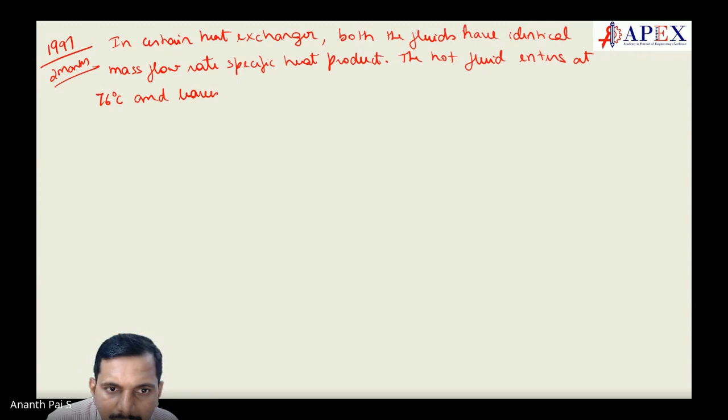the hot fluid enters at 76 degrees centigrade and leaves at 47 degrees centigrade. And the cold fluid enters at 26 degrees centigrade and leaves at 55 degrees centigrade.

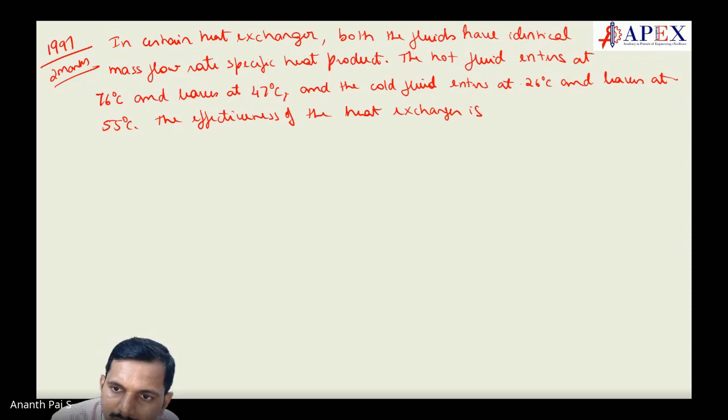The effectiveness of the heat exchanger is: A, 0.16; B, 0.58; C, 0.72; D, 1. Tell me the solution.

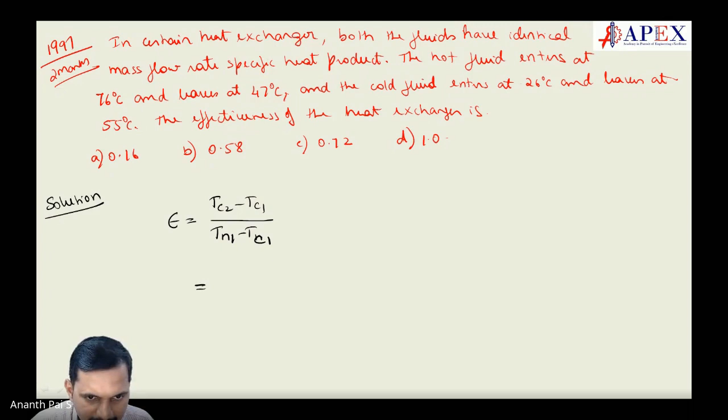minus TH2 and TH1 minus TC1.

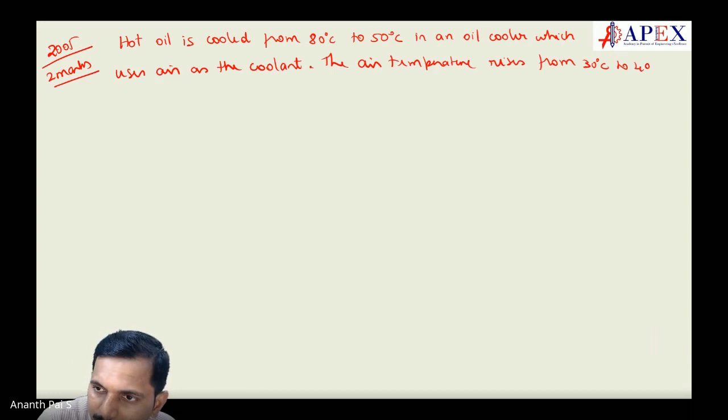The air temperature rises from 30 degrees centigrade to 40 degrees centigrade. The designer uses a LMTD value of 26 degrees centigrade. The type of heat exchanger is A.

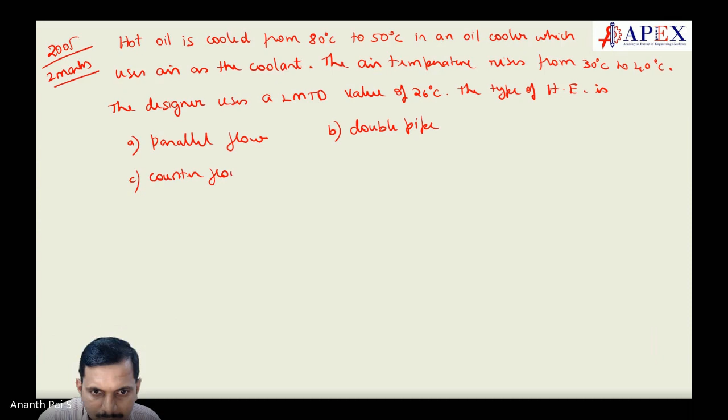Parallel flow, B. Double pipe, C. Counter flow, D. Cross flow. Which type of heat exchanger is that?

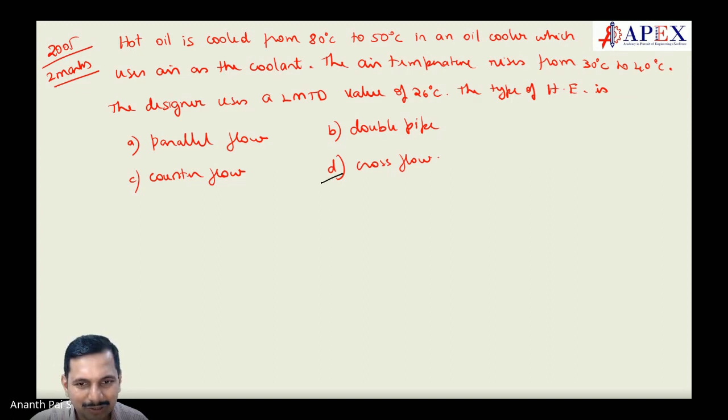Yes, we take the mean temperature. Now, how do you calculate the mean temperature here? That is not possible because until you give the mass flow rate, calculating mean temperature is difficult, right? So you cannot do 80 plus 50 divided by 2. Understand? So the answer is cross flow, because if you see cross flow, the way is like that only.

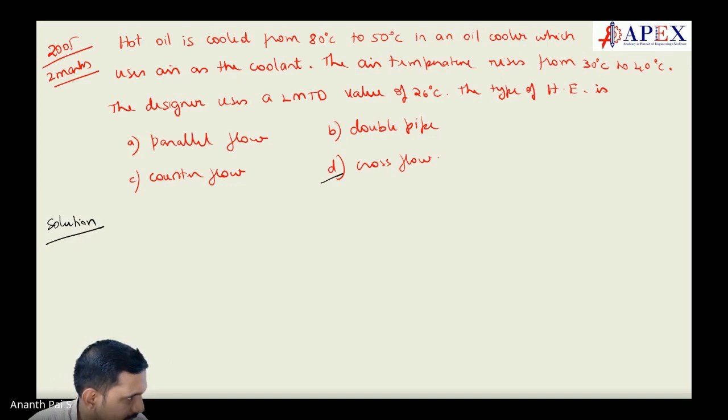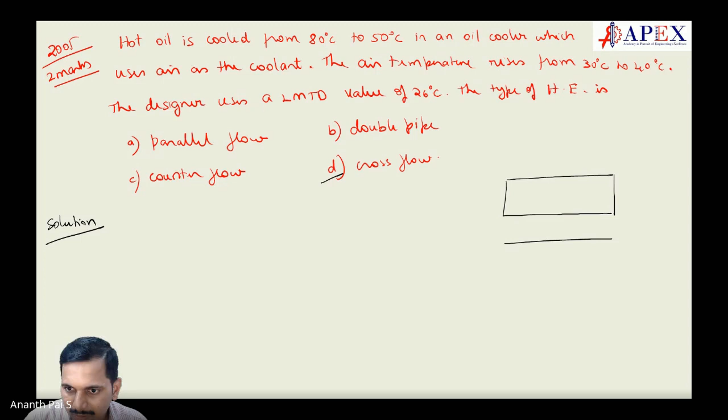Double pipe we reject. Okay, we don't take double pipe. Okay, so double pipe, what is it? I'll tell you what double pipe is. See, it's like this. Okay, so we have two pipes here. So one fluid goes in here, then this goes out, then it goes in, then it goes out. This is called double pipe heat exchanger. Okay, it is not asked much.

I'll tell you what is double pipe. Generally, cross flow, parallel flow, only two things are. Okay, those are also called multi-pass heat exchanger. So how many passes are there? It depends on that. Wait a minute. That is not double pipe. Double pipe is like this. Not two pass. It is only one. Okay, so you have in here, out here.

Okay, so this is in and out, and then what do you call it? Do you call it counterflow or this? You cannot call anything. Such kind of things are called double pipe heat exchanger.

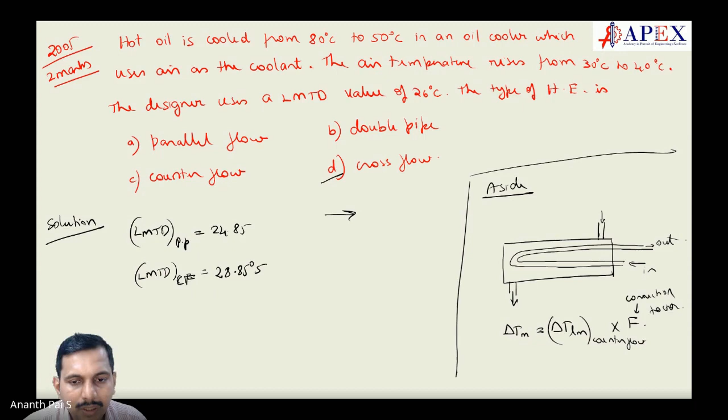First of all, we have to understand how the things go. So if you consider, in parallel flow it is like this, right? This is TH1, this is TH2, this is TC1, this is TC2. So this one is 80, 50, this is 30 and 40. Second case, if you say counter flow, this is 80, this is 50. Then here it is 30 and here it is 40. So this is delta T1, this is delta T2. Here this is delta T1 and this is delta T2.

So practice is important. So LMTD is equal to delta T1 minus delta T2 divided by log of delta T1 divided by delta T2. Like this way.

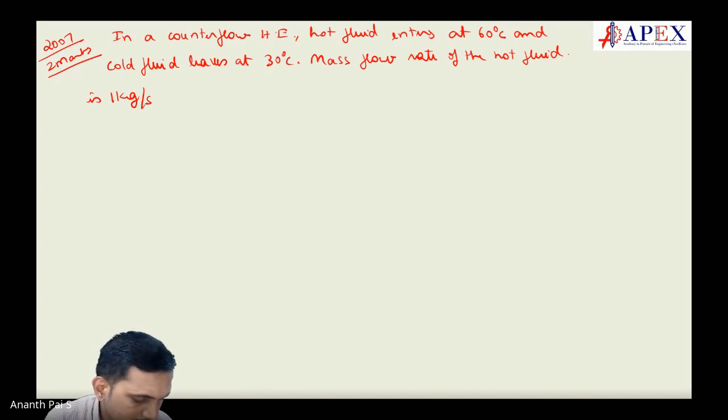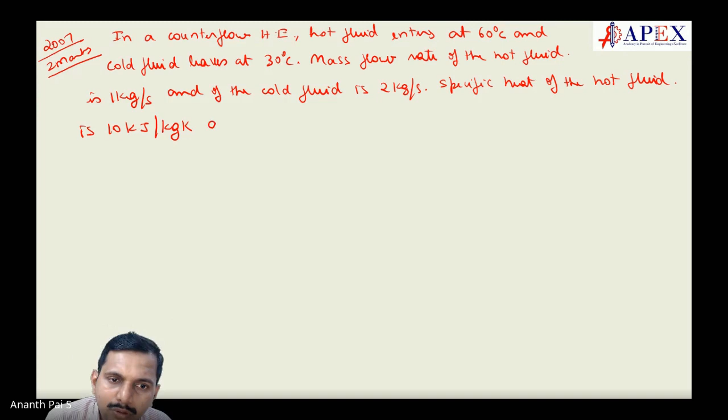is 2 kg per second. Specific heat of the hot fluid is 10 kilojoules per kg Kelvin, and that of the cold fluid is 5 kilojoules per kg Kelvin.

The LMTD in degree centigrade is A 15, B 30, C 35, D 40.

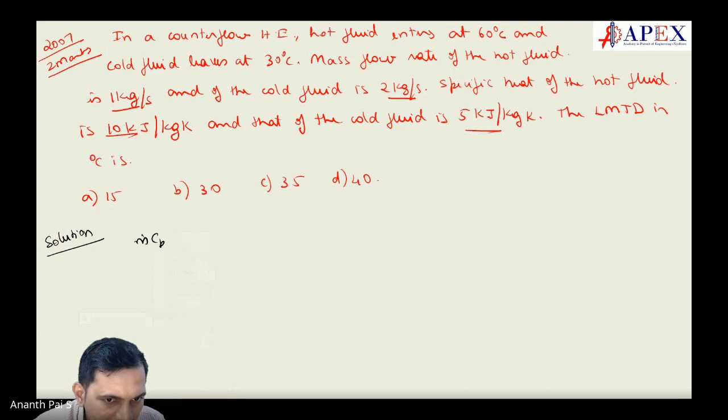It will be the same temperature difference. TH1, I'll write the solution in a different color, it will become a bit more professional, so that when you see the question, it'll be more appealing, right? So, solution is like this. See, m dot H Ch into TH1 minus TH2 is equal to m dot C Cc into Tc2 minus Tc1. Correct?

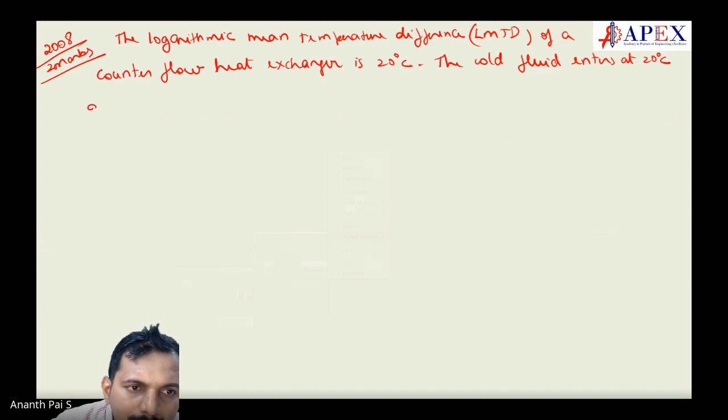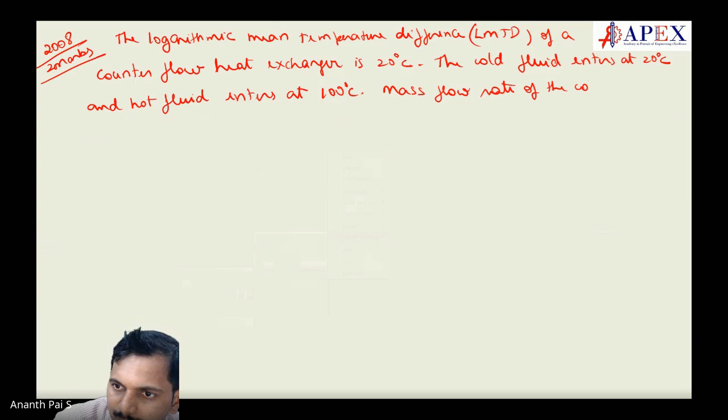enters at 100 degrees centigrade. Mass flow rate of the cold fluid is twice that of the hot fluid.

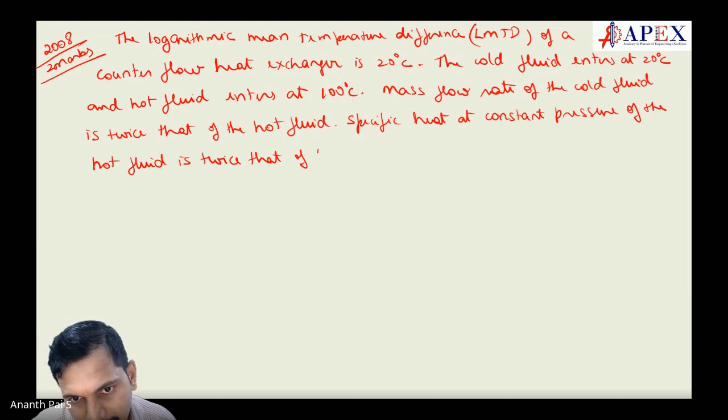Specific heat at constant pressure of the hot fluid is twice that of cold fluid.

The exit temperature of the cold fluid is A, 40 degrees centigrade. B, 60 degrees centigrade. C, 80 degrees centigrade. D, cannot be determined.

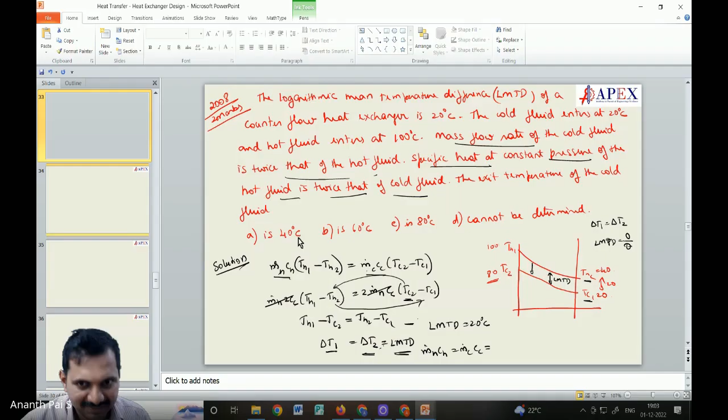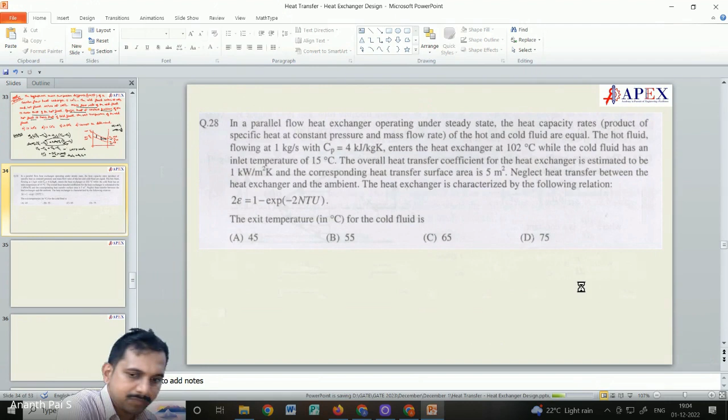Sorry. So this is a 1 mark question which has come in 2009. Okay, so yes, please. No set here. So 2009, it's all set. Huh? Again, back to those sets. No sets.

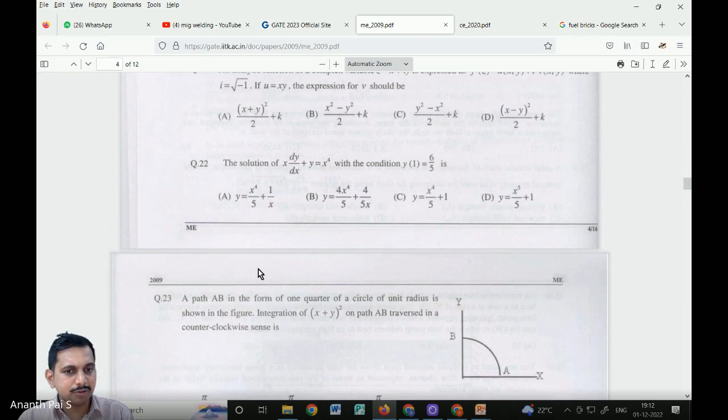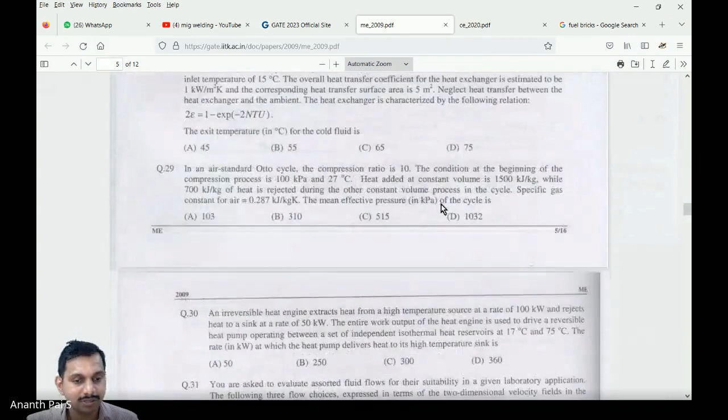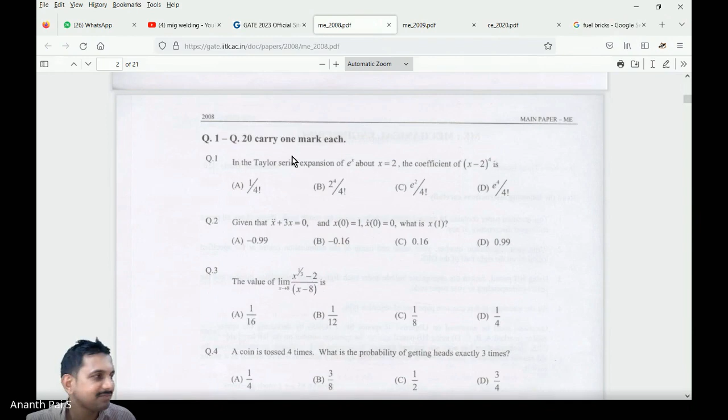Even there 20 marks was this, and 21 to 75, 2 marks questions. Means 2 marks questions very high. 21 to 75 means how many questions? 55. 55 into 2 is 110. Then 20 marks, so 130. Again it was 150, I remember.

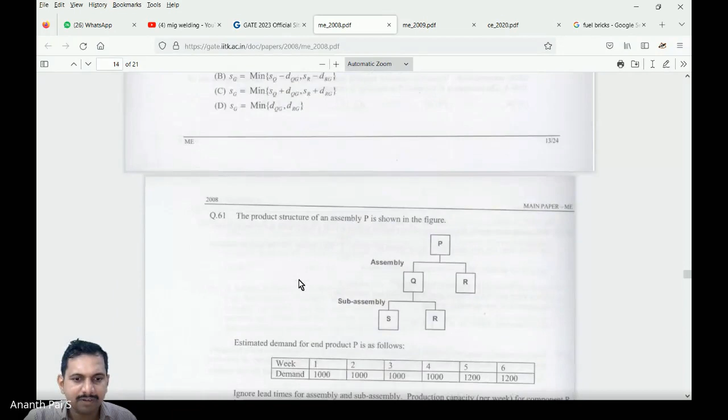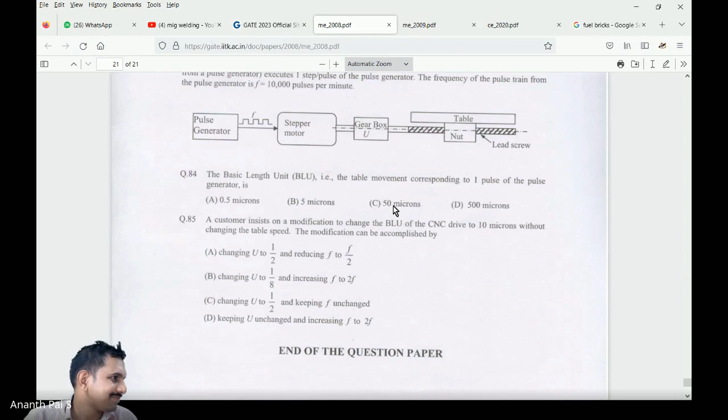So after 75, there were more questions. There was common data question, linked questions from 76, 77, all 2 marks. So there were 85 questions. Yes. So we had a great 150 marks. No aptitude, no English, only technical engineering. Not easy.

Even then, at that time, the maximum marks used to go above 100, around 120, sometimes 130. I don't know whether they were humans or not. We could use calculators. Scientific calculators, non-programmable. They used to check that.

We're done, sir. What is the answer? 55. Correct. So if you don't respond, I will just sit like that for the whole class. Okay, everybody got 55? Yes. So next. Online students.

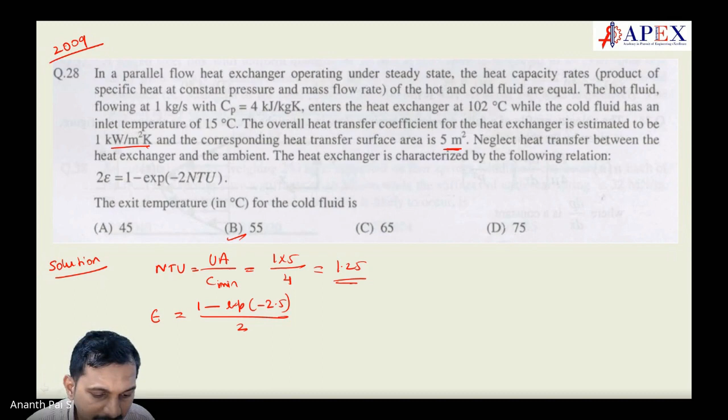No sir, I'm stuck - okay then we will do it. First thing we have to calculate is NTU. NTU depends on Q dot. It is UA by C minimum - what is UA? Overall heat transfer coefficient into A. So it's UA divided by C minimum. What is C minimum? It is 4. What is UA? It's given, overall heat transfer coefficient, so 1 into 5, you get NTU which is 1.25. Apply that to get epsilon - epsilon will be 1 minus exponential of 2 into minus 2.5 divided by 2, so you get epsilon.

0.4589 - I'll take it like that, 0.4589. So if epsilon is 0.4589, what you have to do is find Q. Q max is equal to C minimum into... taking epsilon as TC2 minus TC1 divided by TH1 minus TC1. So what do you require? You require the exit temperature for the cold fluid, TC2. Look at it, easy.

Where were you stuck? Like that, epsilon equals TC2 minus TC1 by... that one was for heat capacity of hot greater than heat capacity of cold fluid. Is it the same as earlier? Both are same, no? Since they're equal, we can take it anyway.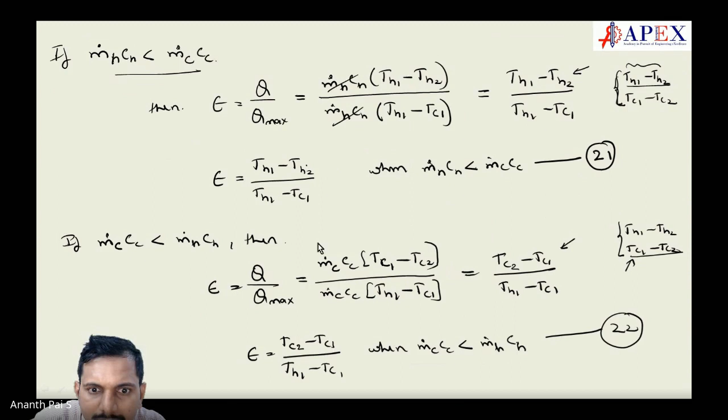I was stuck here - what is epsilon? You can take it, I found it till equation 4. See here, today I did that, where did I do it? Somewhere this morning I did that. Yes sir, they're just in front. Here - no, no, front. Epsilon, I remember doing this equation.

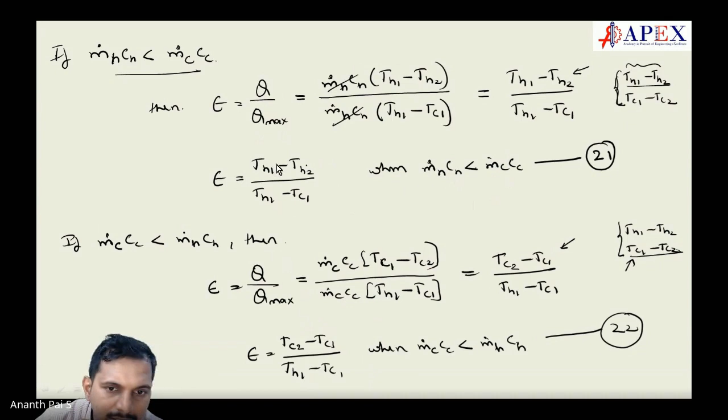This is when m dot h is not less than this. If both are equal, then this and this are both equal, same. Makes sense, because TH1 minus TH2 is equal to TC2 minus TC1. That's correct, clear?

Okay, next question has come in 2010, a 2 marks question, let us see that.

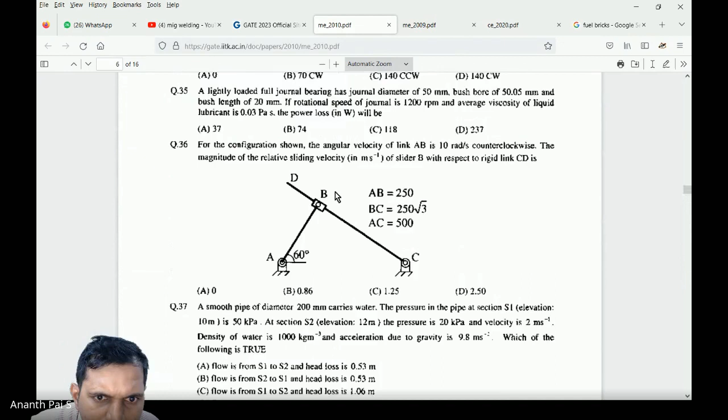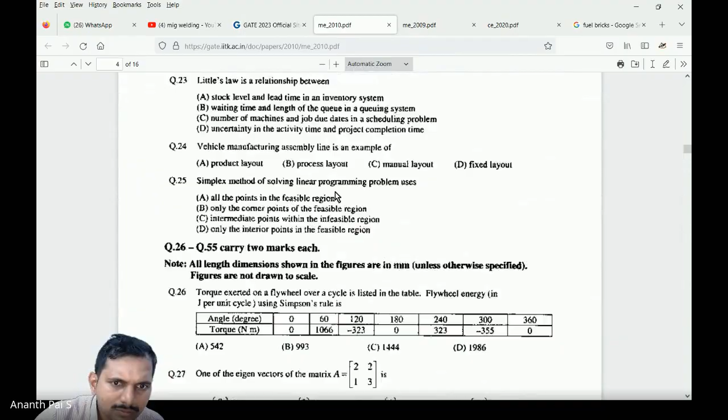You send the photo in WhatsApp, sir. You sent it, is it? No, you send the photo in WhatsApp. Oh okay. I have to take the photograph and send you. Okay. It's quicker, but one of the difficult things is finding my mobile. It's over here, I'll do that.

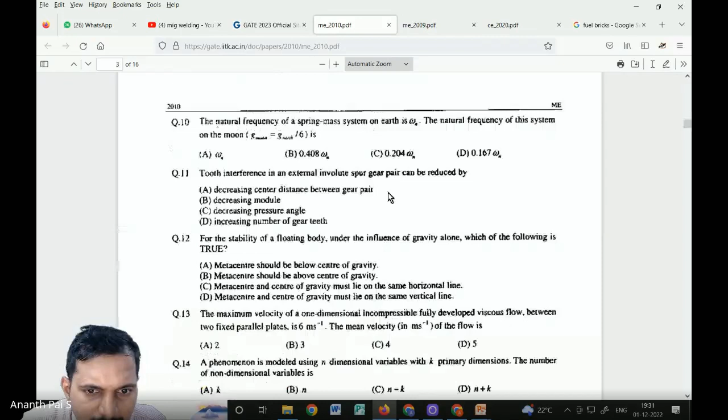Which one of the following welding process uses non-consumable electrode? This kind of question will come. That's why I did welding like that.

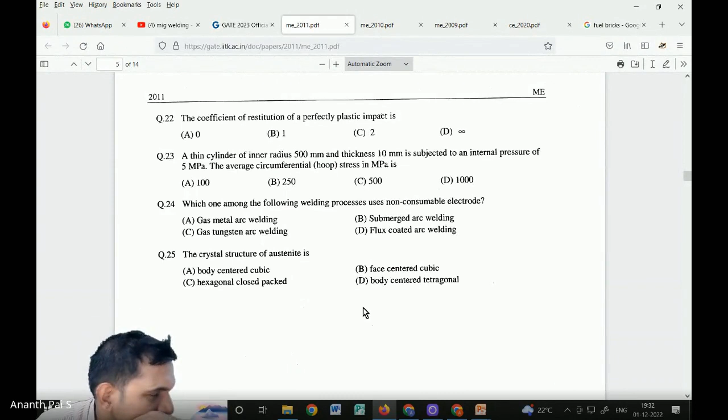Take. You do it, I will write it here. Okay, so it's fine, you do the question, by then I'll finish writing.

Okay, question. This is 2010, 2 marks. An industrial gas with Cp equal to 1 kilojoule per kg Kelvin enters a parallel flow heat exchanger at 250 degrees centigrade with a flow rate of 2 kg per second to heat a water stream.

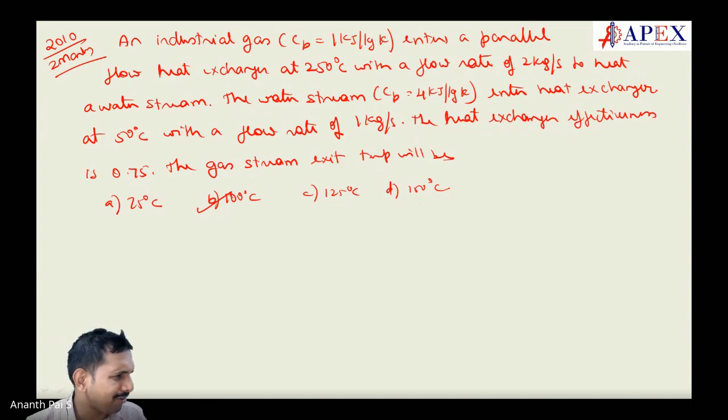You have to see these professors' interviews on YouTube. There are a lot of them - one is Professor Sarit Kumar Das, one is Professor Sundararajan sir. They have their interviews on YouTube where they talk about how they came up previously. Very fantastic it is. Today, because of YouTube, everything we get, is it not?

2010? 2010 is over, 2011 now. Okay, 2011 question is cold water. Are you seeing cold water somewhere?

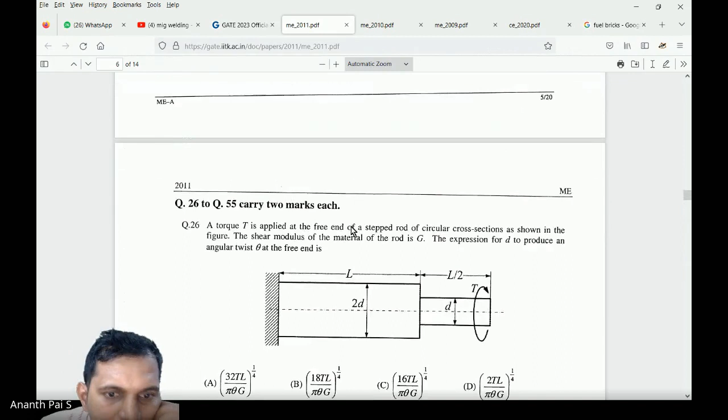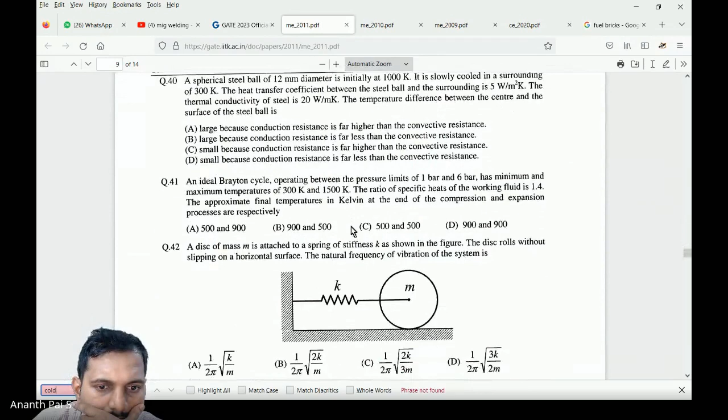Hey, when I have this, no. Students, help me out in getting that cold water. It starts with cold water.

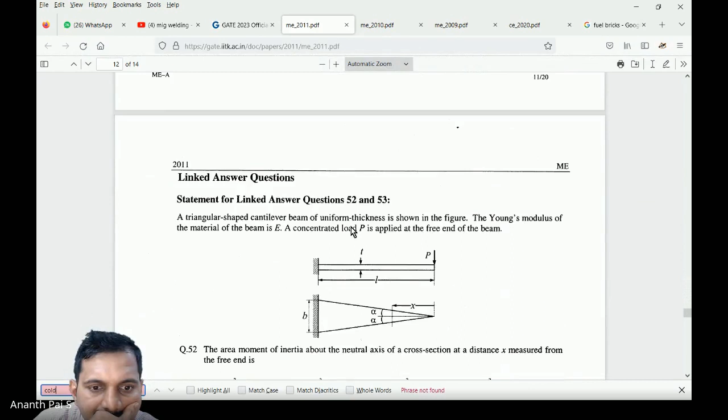Either he is wrong, where did he get that question from? Yeah, it is there in chemical engineering. But he should put - no, it is from chemical engineering.

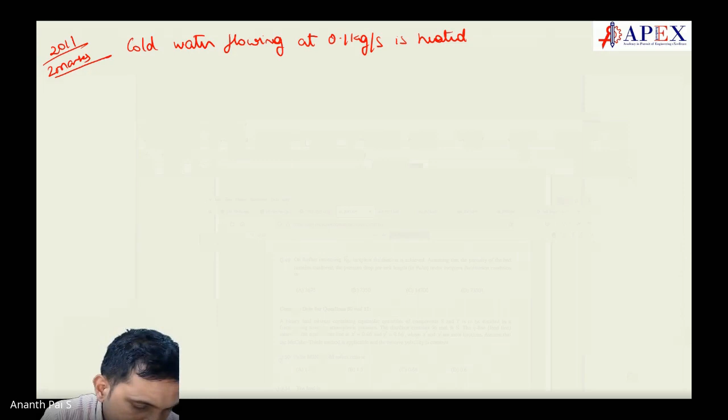So this is 2011, 2 marks. Okay, cold water, write it down along with me students. Cold water flowing at 0.1 kg per second is heated from 20 degrees centigrade to 70 degrees centigrade in a counterflow type heat exchanger.

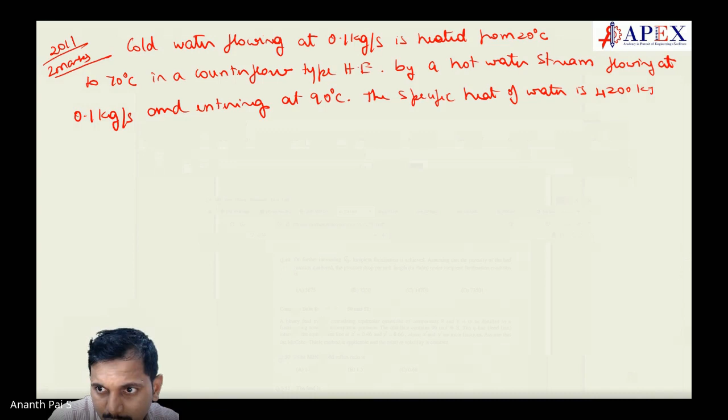by a hot water stream flowing at 0.1 kg per second and entering at 90 degrees centigrade. The specific heat of water is 4200 kilojoules per kg Kelvin, and density is 1000 kg per meter cube.

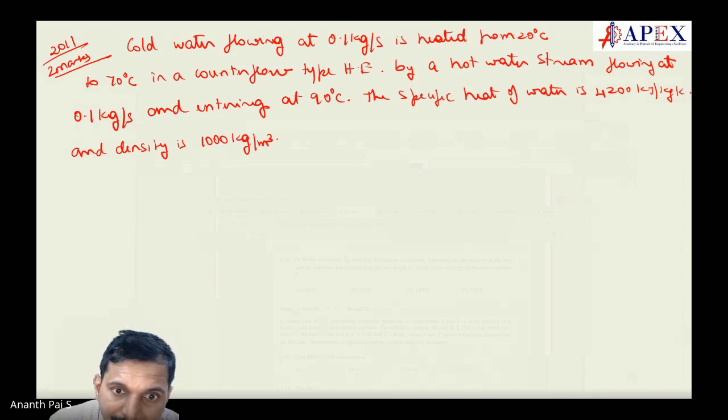If the overall heat exchanger - the overall heat transfer coefficient U for the heat exchanger, sir.

Yes, please - specific heat of water is 4200 joules, not kilojoule, my bad, joules obviously, thank you.

Heat exchanger is 2000 watts per meter squared per Kelvin. The required heat exchanger area is...

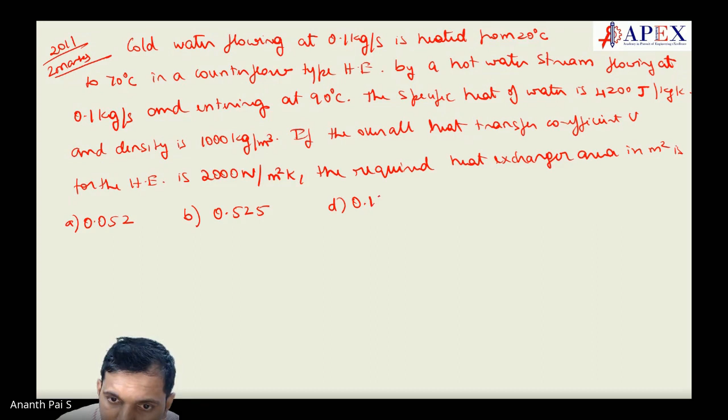Area in meter square is: A, 0.052; B, 0.525; C, 0.151; D, 0.202.

There is quite a lot of questions, students.

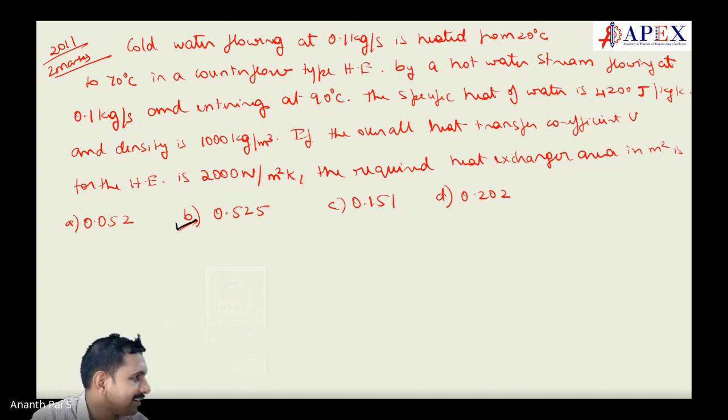I am thinking of doing that. I'll get more earning there than doing gate coaching. Yes or no? But they are.

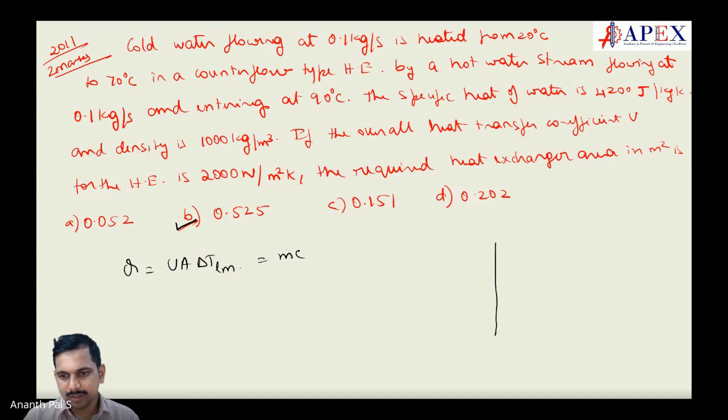See, let us see. It is a counterflow arrangement. This is the hot fluid, this is the cold fluid, right? Hot fluid goes at, okay, cold flowing at 20 degrees centigrade to 70. And then the hot stream flowing at 0.1 kg and 90 degrees centigrade. Specific heat of water is given, okay, 1000 kg. So you can find this, technically you can find the other one, right? Then you put this, done.

This is, see, m dot is the same, is it not? And it's the same water only. So this being 20, this also should become 20. So this is 40, correct? No, because m dot is the same.

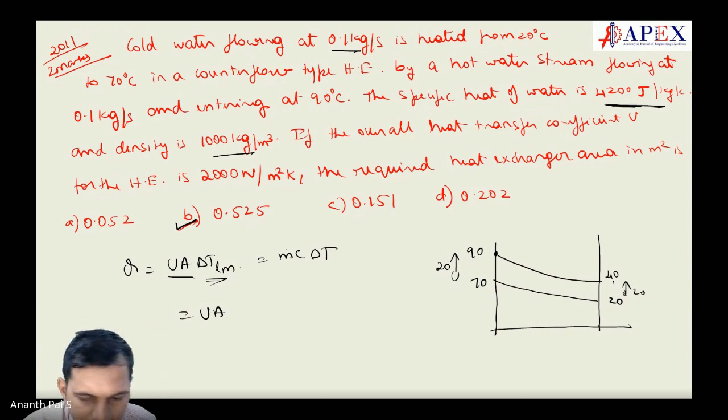Alright, last question. This is from 2012. This has come in 2012, students, for 2 marks.

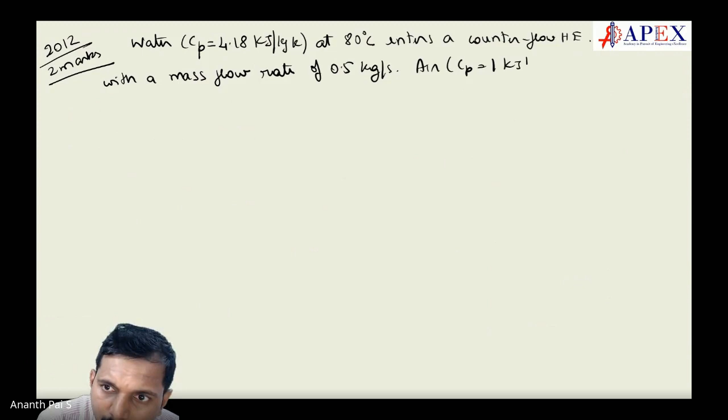The question is: water with Cp equal to 4.18 kilojoules per kg Kelvin at 80 degrees centigrade enters a counterflow heat exchanger with a mass flow rate of 0.5 kg per second. Air with Cp of 1 kilojoules per kg Kelvin enters at 30 degrees centigrade with a mass flow rate of 2.09 kg per second. If the effectiveness of the heat exchanger is 0.8, the LMTD in degree centigrade is: A) 40, B) 20, C) 10, D) 5.

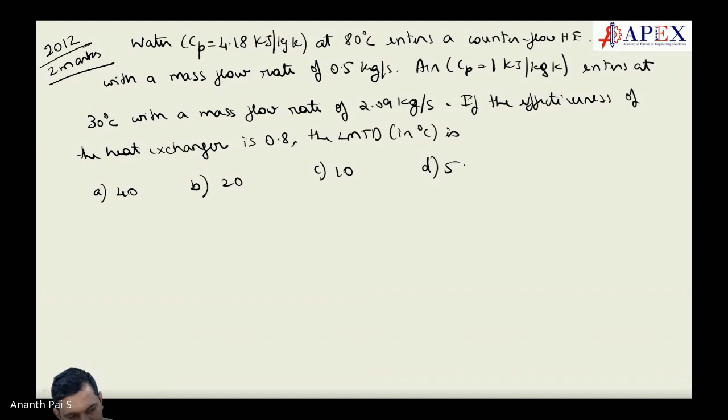Alright, done. Answer is 10, students. Try to do that. You can do it. Yeah, got it sir. Yes. Thank you.